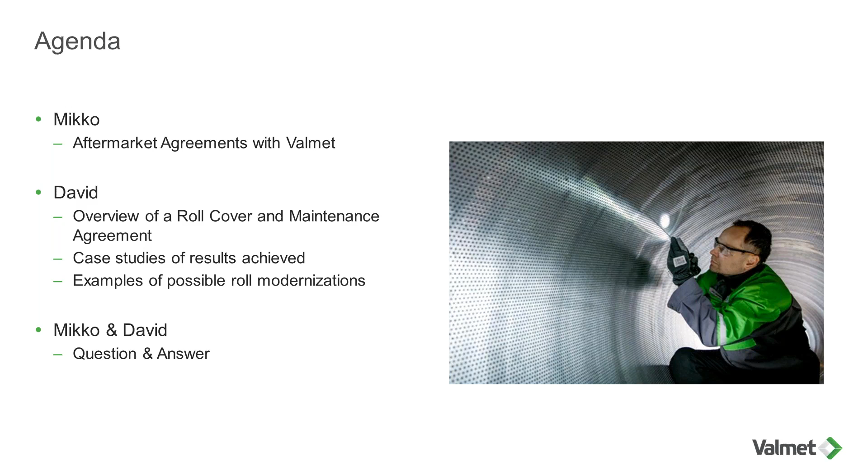Finally, we'll allow 10 to 15 minutes of time at the end for questions and answers.

Take it away, Mikko. So, good afternoon, everyone. As you heard, my name is Mikko Viljama, and I'm the head of the Valmet agreement business here in North America. I've been with Valmet for 25 years, the last 15 years or so in North America, and I am currently located in Atlanta, Georgia.

Before we let Dave talk about rolls, I was going to give a short 10-minute overview from 25,000 feet of Valmet's agreement business, how Valmet approaches these agreements, and what are some of the things our customers are looking for from these partnerships. About 10 years ago, Valmet made a strategic decision to focus on long-term agreements.

This wasn't really a difficult decision to make, as the message from customers, you guys, was loud and clear. You wanted to move away, when possible, from traditional transactional business, and were willing to seek out other easier methods to do business with Valmet.

A little bit of our services philosophy, and if you start from the bottom, you see that it starts from our core values, which are: safety comes first, we want to be close to you guys, we have people you can trust, and hopefully also solutions to match your needs.

The second layer of this philosophy is the lifecycle approach, which means that we want to be part of the product from the day it leaves our facility to the day it becomes obsolete.

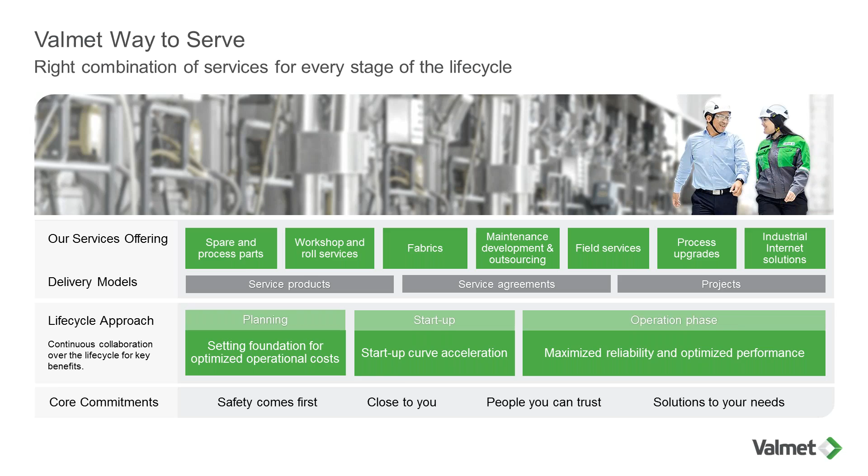You see the same offering here with maybe a little more detail, and I'm assuming that most of you are familiar with these, so I'm not going to go through them. Rather, my message here, when we look at this slide, is that basically anything Valmet offers, may it be a product or service, can be built into an agreement format. So if you are buying something regularly from Valmet, I would highly recommend that you ask your local friendly mill sales manager if there are any opportunities to simplify this business and make it hopefully even more beneficial for both parties.

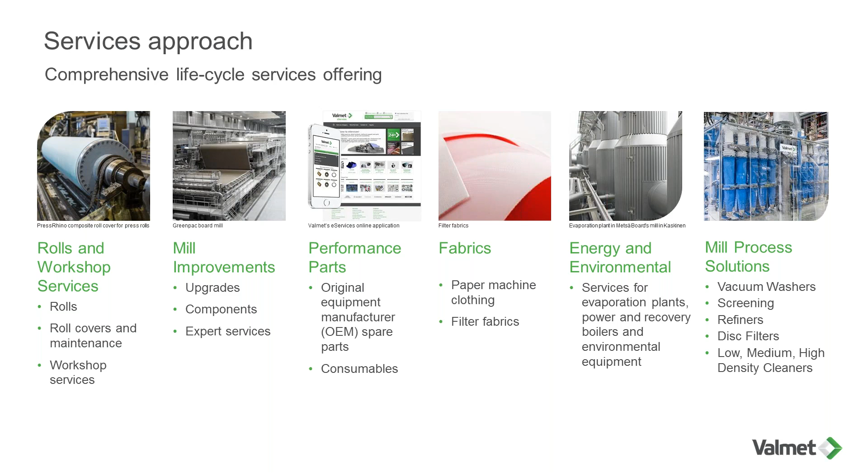So what's typical for an agreement then? My personal opinion is that it makes little sense to make an agreement for just 1 or 2 years. Therefore, I always recommend starting with at least a 3-year agreement. The reason is that it takes some time to get to know each other, for us to understand how you operate, and what might be the possible challenges you have at your mill. So we typically start with a 3-year agreement, and hopefully at the end of that period, we end up extending it for another set of periods.

These agreements can be either corporate level agreements or mill level agreements. If they are corporate level agreements, they typically work so that the individual mills are automatically joined to the agreement, or the mills can choose if they want to be part of an agreement.

With corporate agreements, and here I'm talking about any kind of agreement—rolls, stockers, consumables, and so on—we talk about different tier levels typically, depending on the business volume that the mill does with Valmet. With these different tier levels, we of course include different services, incentives, and programs, such as continuous improvement programs. We approach these agreements as projects.

Project agreements also have a dedicated project or agreement manager who manages these agreements. Especially if it's a corporate level agreement, we establish a dedicated agreement manager for that.

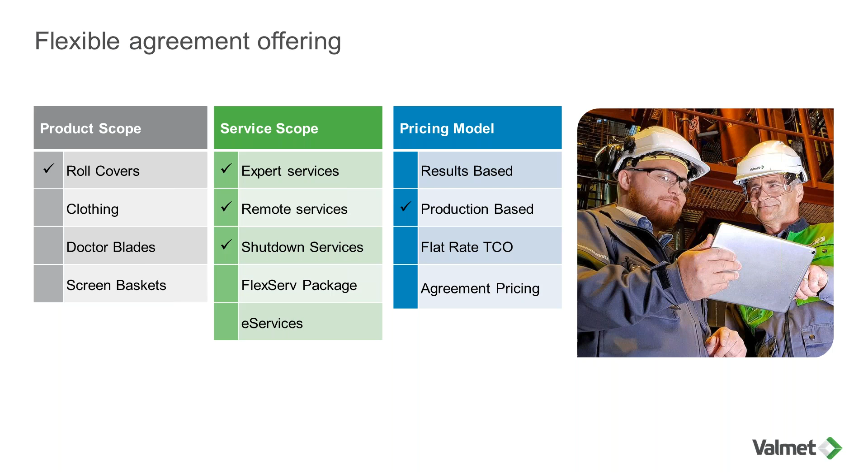What I wanted to point out here is that we Valmet people are famous for wanting to talk about our own products and services. But I personally would like to turn this 180 degrees around and look at each of your mill functions or personnel, the tasks and responsibilities they have, and understand what keeps these people awake at night. And if there are challenges, especially if they hinder you from concentrating on your core business, which is making paperboard or tissue, let's see if there's something we can offer to help you with these challenges.

So a lot of agreements, but not too many identical ones. Even with a lot of different agreements, we still see some trends, some common drivers which make our customers seek these partnerships. By far the reason number one is reliability. It seems like everybody's looking for more reliable operations, partners, etc.

A solid number two is cost. I'm not talking about finding the lowest price. I'm talking about partnering with someone who can reduce the overall cost during a certain time frame and also help the mill, the customer, to budget this cost and stay within the budgeted cost.

Everyone appreciates a proactive partner. To give an example of how Valmet does this proactive approach, we can take a look at, for example, the roll agreements, which Dave is going to talk about in a moment. We always start those with a baseline audit to understand the current situation, and after we know what that is and what the KPIs and targets for that mill are, we build a roadmap for how to achieve those goals.

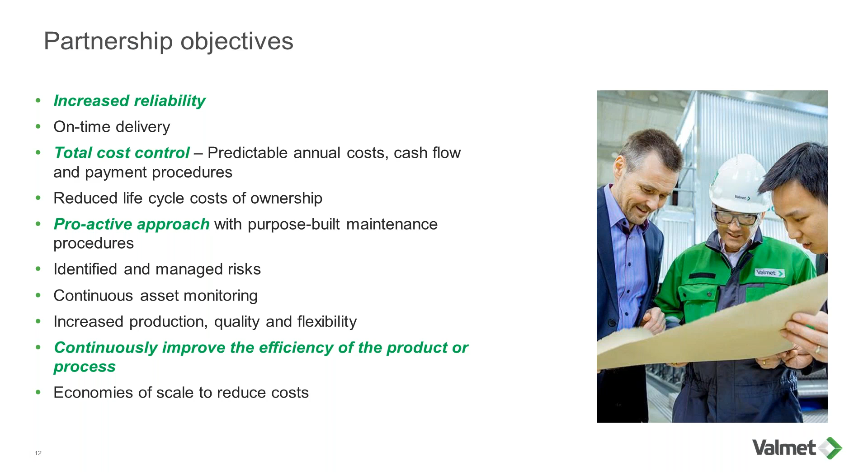We signed the first agreement 15 years ago with Temple-Inland's Ontario mill. We have a culture of doing these agreements, and we also have a dedicated group of people who manage these agreements.

The most important thing for us is to understand each customer's specific KPIs and targets, so that we can build that tailored agreement for that customer. And when we have those KPIs and goals, then these will become our commitment and our common goals to achieve for both of us. I already mentioned the total cost of ownership, the TCO approach.

So with Valmet agreements, you'll get access and support not only from our local people here in North America, but also from our experts globally. And with that, Dave, I'll give the floor to you. Thank you.

As Mikko mentioned, there are several levels of agreement within the different service models of Valmet, ranging from spare parts and mill site services, roll services, etc. But even within the roll portion of the business within our service sector, we have ranges of agreements as well. Mikko mentioned the first agreement being Temple Inland Corporation in the mid-2000s.

Prior to that, we even had a single mill agreement, which probably started several years prior to that, in the 2004 range, and that would have been probably what you look at on this scale as a supply agreement, with discounts associated with a volume given to us to work on.

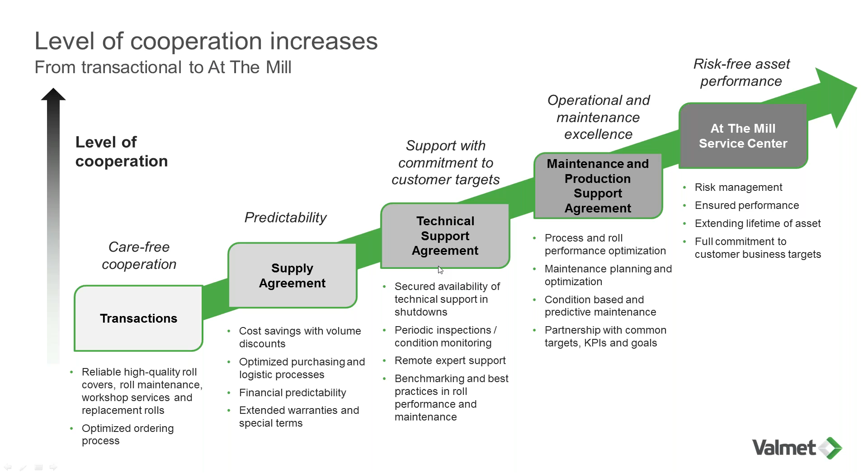And it all starts, if you're a new customer, with audits of both covers and the mechanicals of the rolls, so we understand what you have. Then that baseline of where you are is compared to what your goals are. And by comparing what's currently in service and what your expectations are for performance and cycle times, we can sort of map out from there what the scope of work needs to be.

And if the desired run times are maybe a little bit more challenging than what the current equipment can do, then we have upgrades and things of that nature to help extend your run times as well.

Once the path forward is chosen, Mikko's group steps in as agreement manager. The goals are set, and we have semi-annual, annual, or quarterly reviews based on the customer's desire to touch base and see how we are performing against what our goals are.

The information can be kept in Valmet Asset Manager. Some of you guys may be familiar with an older term known as Roll Tracer. Roll Tracer has been upgraded to the point now where it can house all of the history and scheduling needs for not just rolls, but say fabrics and spare parts as well. So it's a broader service than just a roll tracking system.

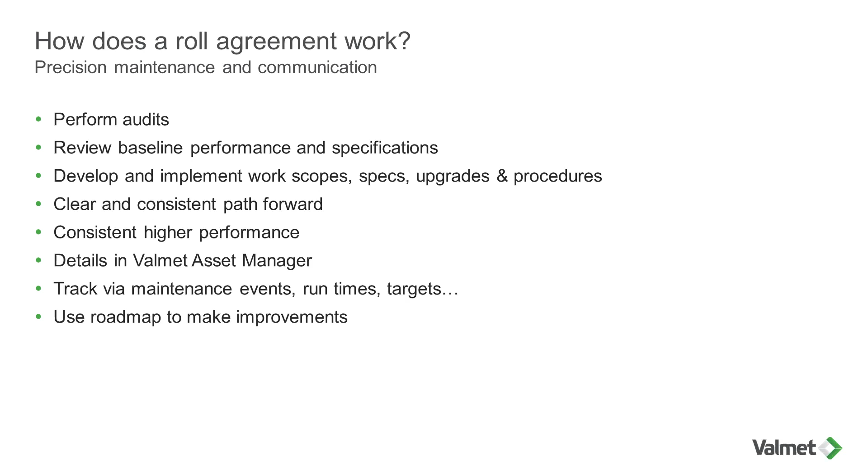Then as far as what type of support you guys should expect both off-site and on-site from your mill, typically the way it would work, this focuses on a single roll, if you will. Typically there is a product sales manager there to support during the down day when the roll's removed. It's up to the customer typically whether they want to handle the logistics to move the roll or they want Valmet to. The roll is torn down, inspected, documentations of inspections are created and sent.

If there is no additional work that needs to be done, the remainder of the maintenance is taken care of. At the end of the day, the documentations and the reports are pulled together and sent to the customer.

Within the same time frame as the roll is returned, we would usually have the PSM there also for installation support, including things like nip impressions and things like that.

When we take our service models and some of our different technologies for simulations and whatnot, we can look at what happens between when we service the roll and the next time it's removed.

We can compare, based on vast experience with new and old machines, where your equipment is running compared to your competitors in benchmarking. That's always of interest to people. Performance optimization through simulations is never a bad thing to take a look at.

Condition monitoring, whether through iRolls, accelerometers, or monitoring equipment in conjunction with our automation group using the industrial internet, is all available. Then, as simple as using the asset manager, you can monitor conditions to some extent by comparing run times and what was done on different maintenance services.

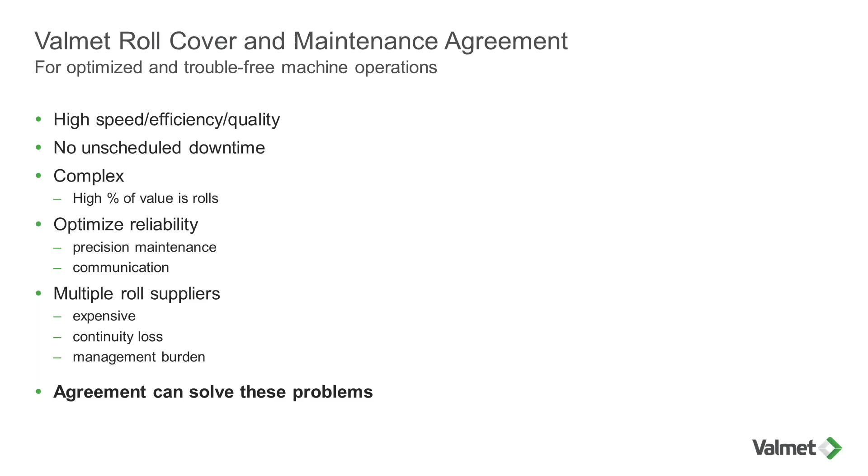So the systematic approach - basically we feel you have pretty vast experience running your own mill. We have experience building rolls, rebuilding rolls, making covers on the service side, but we also have access to Valmet technology and new equipment through the capital group.

Combining those three and working together really can equal a solutions package that's very difficult to be touched by others. Reducing cost, managing your assets, and even understanding what your next investments need to be can be very beneficial and improve revenue.

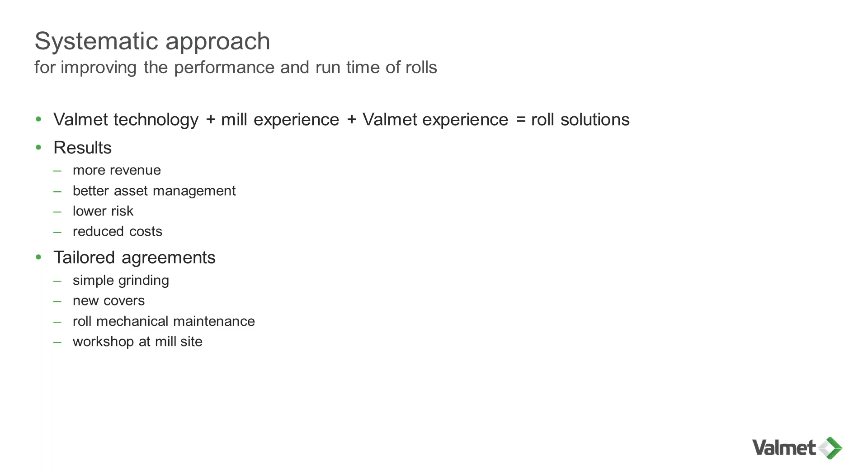This last bullet point we sort of touched on - it's a reiteration of the different levels of agreements available out there, even just for rolls. Could be a simple grinding contract, a simple mechanical contract, maybe just covers, or we could even get involved under the right circumstances and help you run your service center at your mill.

The other piece integrated pretty well within roll contracts is replacement rolls. The technical age of most machines in North America is probably an average installed date of around 1985. That means there's a lot of old but robust equipment out there still running well.

But since 1985, you can look at the host of suppliers now under the Valmet umbrella. We've made significant technology improvements in all types of rolls in that time frame.

And as you order a new spare roll, obviously we cross-reference the age of your roll, the design of your roll, and consider what types of upgrades can be made to impact its runtime and performance while it's in the machine.

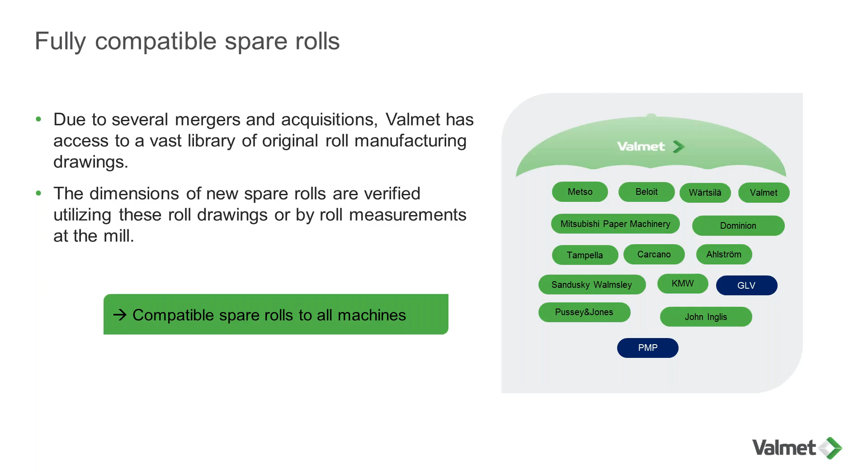When it comes to discussing saving money and agreements, case studies often open eyes better than nearly anything else. So we're going to run through several case studies here, some from a standard mechanical service agreement, a tissue, and maybe two board examples.

This was a fine paper mill in the Northeast who had an agreement with a local shop but was unaware of seal clearances on the suction roll seals to the shell. They were unaware of the deckle clearances on the end and what they needed to be. They didn't have bearing clearances necessary other than from the book, and there were a lot of details about an old Beloit or Valmet roll being serviced locally.

What type of benefits usually come from this type of agreement? Usually the ones that pay off in large dividends are increased production and improved sheet handling, which actually becomes increased production, and in some cases better sheet quality if you're able to avoid things like sheet marking. That allows you to chase a different customer base.

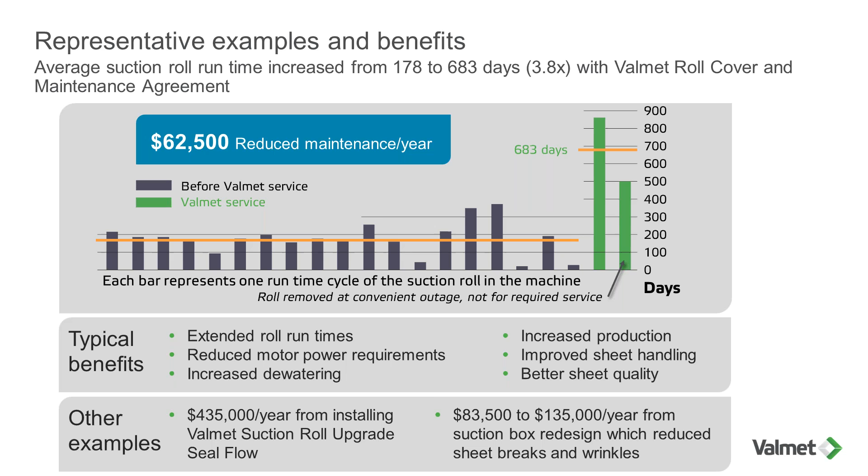This is the first of our liner board examples, a lightweight liner board / bag producer in the Southeast. This machine was built in the 1980s and originally commissioned to run high-speed newsprint. They came to us after originally replacing the granite roll with a PressJade release type cover, which is designed for high stickies in recycled LWC and/or newsprint.

They were moving to board and came to us asking about the give and take between the two designs, a PressJade W and a PressJade release. Put simply, the W stands for wear and/or wood containing grades, and release stands for high DIP content, so the release design is to combat stickies. The W is a little less focused on release and more focused on long-term wear. This customer was concerned that moving to a wood-containing grade would wear the roll out. We talked them into not making the change, leaving the press jade release in place to see if their concerns were warranted.

In the end, they're still able to run the roll to 3-year intervals with no conditionings in between.

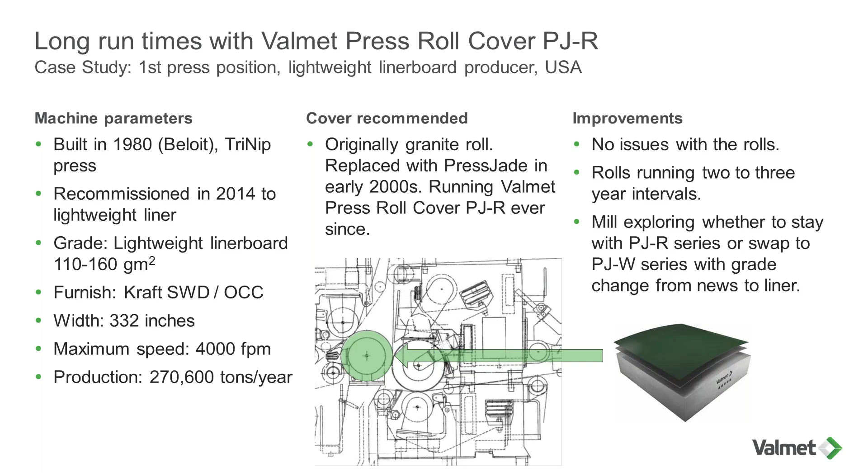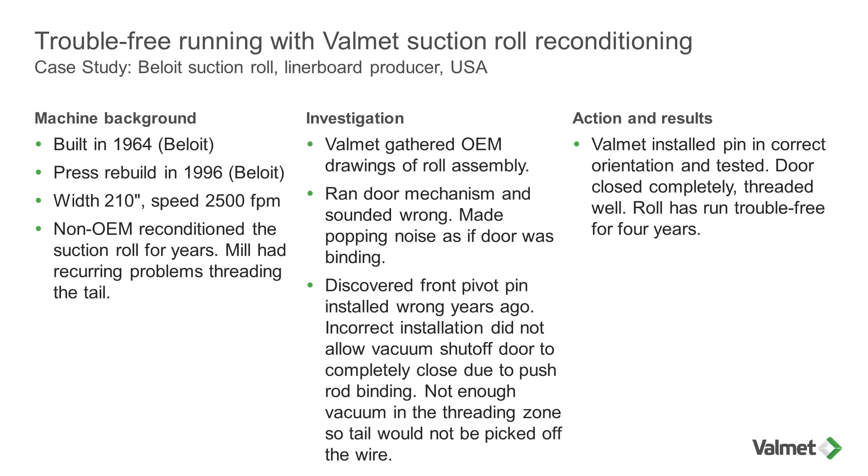The second example is a board producer in the South. These guys had an original build from 1964, fitted with an open ENP shoe press in 1996. They have probably an LMP, would be the best way to describe their first press, followed by the shoe press. For that design, to thread the press section, you have to have what's known as a rabbit trap.

Huge risk of wrecking the shoe press. So being able to go back to the original design and original intent of this roll saved quite a big press wreck.

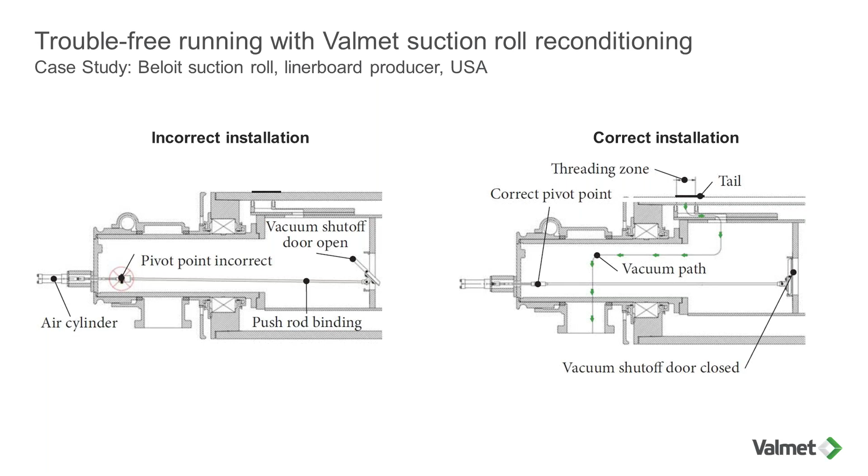Here's another rebuild situation. The machine was originally a 1977 Tampella, rebuilt by Beloit in '99 with two back-to-back open ENPs. This particular customer was struggling pretty badly with roll cover wear, blanket wear, and even mechanical wear on the inside of the roll.

We were able to modernize this roll, installing capillary tubes, what's known as a hydrostatic type shoe, vastly improving the lubrication, reducing temperatures, and basically not just saving the roll itself, but all the equipment around it.

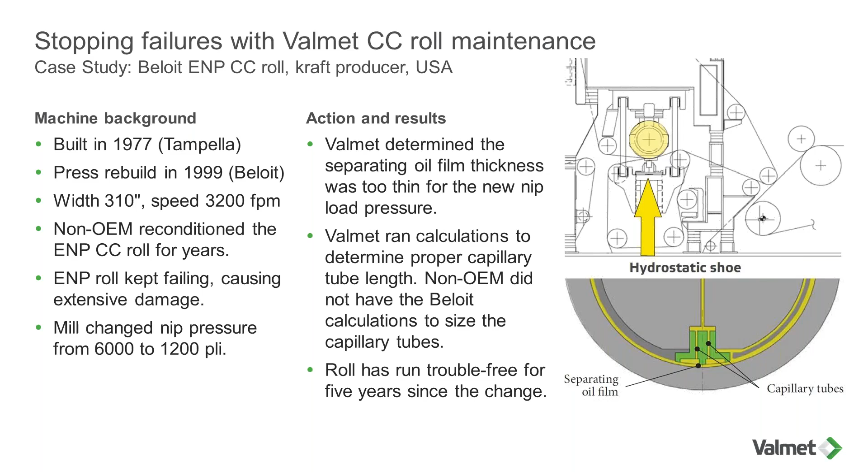This is more of a tissue case. In the tissue mills, the nips against the Yankee with pressure rolls and suction rolls is basically the most important thing going on. This particular customer, we had done some background work for them to simulate the differences between rubber and poly. We found that moving to poly would improve their solids some. This is a case in South Korea where we sold these covers.

We also sold them what's known as an iRoll portable. Both Valmet and some other suppliers supply permanent iRoll type or smart roll type devices inside the cover for monitoring pressure and giving the customer an indication of what their nip profile is like while the roll cover is in operation. The portable iRoll is something that only Valmet offers, and this allows us to install a similar sensor on the surface of the roll and allows us to run it up to speed and check all of the profiles.

If you have an accurate design of experiment, for lack of a better way to put it, if you know what you want to look at when you get started, you can solve nearly as many problems as you would with a permanent install, and you can accomplish everything you want in a 4 to 8 hour time frame. You don't have to worry about the long-term maintenance hassles of keeping milliamp type electronics running in a very wet environment. It can be done, but it's not easy.

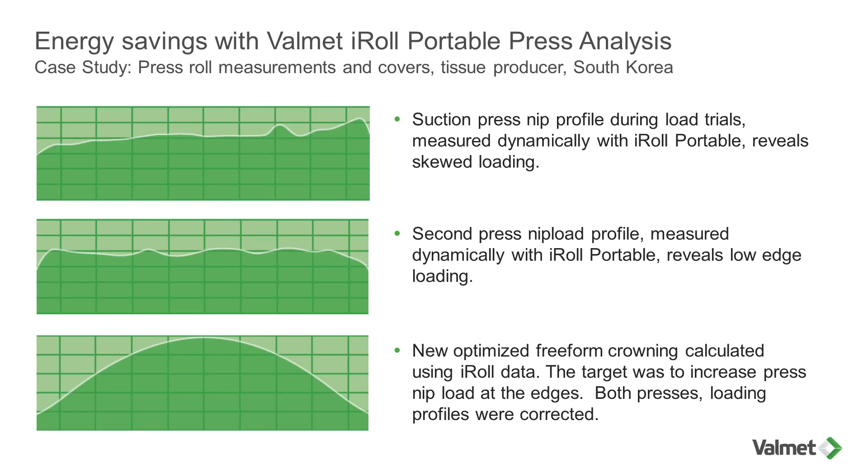In this particular case, the customer was showing pretty poor front-to-back skewing on their suction roll, and the second press roll showed pretty significant drop-offs on the edges. They were not able to maintain pressure out on the edge. Whether it had something to do with the roll or the Yankee, I'm a little unsure of—I haven't studied the case that much. But by analyzing the iRoll data, they were able to create a new crowning profile for the roll, which improved not only their overall solids coming off the Yankee, but also their profile.

Now I'm going to step back to the previous slide to review the results. They saw a 5% steam consumption reduction, and also saw improved moisture profile and improved solids coming off the Yankee, plus an increase of 30 meters per minute—which, had they factored in that 5% steam consumption as well, would have been an even bigger gain on the production side.

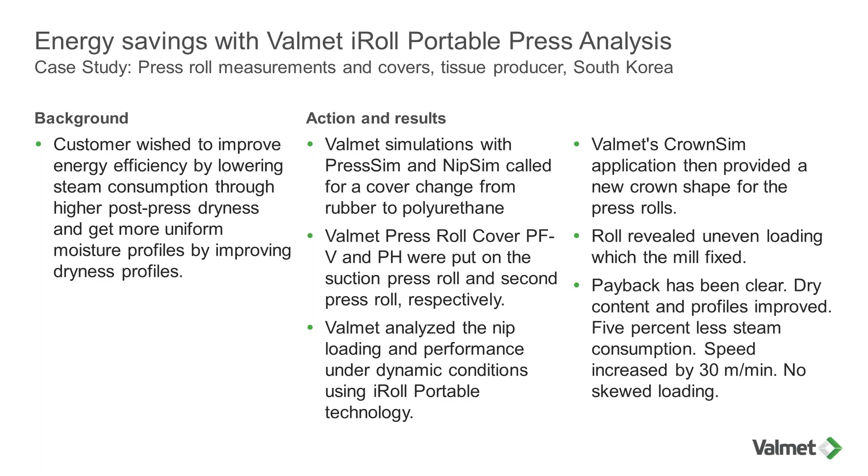To spend a few minutes explaining our maintenance concept: we talk about scheduled maintenance or regular maintenance as the services on the left. I'd say think of that as an oil change rather than a full overhaul on your vehicle. This is where the roll comes in and parts are changed, where parts that might make it a second run are inspected, and we do not totally tear down bearing assemblies. That's the key to what scheduled maintenance is.

If you run a tissue machine, it's an oil-based application, and you get 6 months on a rubber cover in the nip, you may pull it out after 6 months, grind it, put it back in the machine, pull it out after another 6 months, do a scheduled maintenance, put it back in the machine for 6 months, pull it out, grind it, and then on that next maintenance rotation, you would potentially go to what we call recondition services—where not only are you going through your regular wear components, but you tear down, inspect the journals, NDT the journals, NDT the heads, and verify that all of the long-term components are still in good shape.

Finally, on the right, what's highlighted in the box is what in North America we call modernizations, but I think on the global level they still call it upgrade type products. You've heard me mention that a few times on the call, and I wanted to make sure you guys were aware of what I'm talking about.

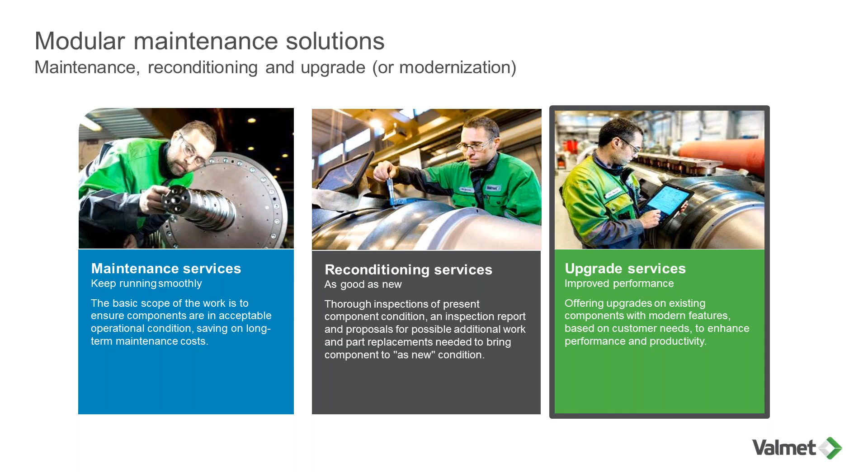If you go back to the average age of equipment in North America—at least roll equipment—being maybe from 1985, there have been a lot of upgrades to both suction rolls and couch rolls in the past 35 years. Here are some examples: some of the older designs, like Tampella or Carcano, might not have the internal worm screw for adjusting the box, in which case customers at times, if they want to adjust a couch roll or pickup roll, may actually have to put the sheet in the couch to be able to move the box. That's painful and can be upgraded to a box that you can rotate on your own.

I'm not going to go through each of these, but another one worth mentioning is the internal ShellFlo H, oscillating internal shower, which today we also have a compact version of for maybe North America specifically, because 70% of the installed base here is Beloit, and the fit between the box and the shell is a little tighter for Beloit rolls, so the compact version may be thought of as a Beloit design for internal cleaning showers.

This basically is water driven. It oscillates back and forth. It can be tuned in to come on during breaks and clean the shell from the inside out rather than from the outside in. Today, most suction rolls that have cleaning showers are outside in. The advantage of being internal is that all of the material knocked out of the shell is now being knocked out of the shell instead of getting caught up in your suction box and anything else you wouldn't want it to get involved with. If you had some vacuum leakages going different ways, you could even be preventing water from getting into your bearings. So that's another example.

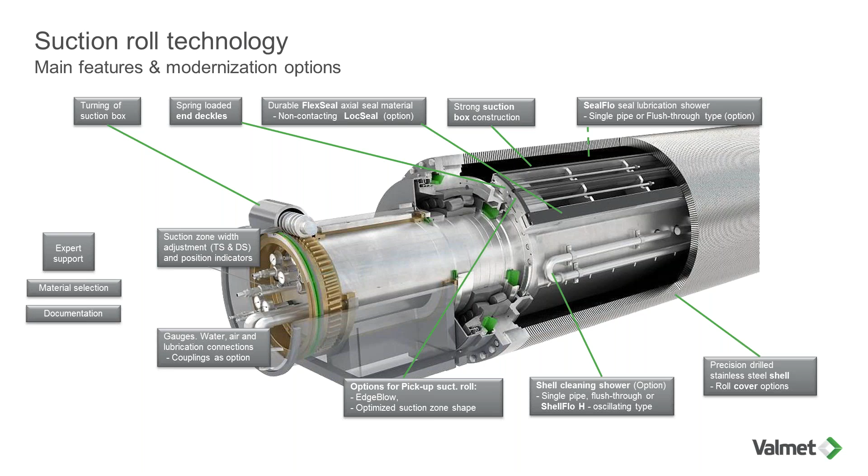A quick 2-slide opportunity to talk about crown control roll upgrades. One of which I see to be most beneficial is your standard Valmet CC roll, designed in the 60s, probably on up into the 90s, often had an inline drive hub, and due to that, had to have a triple race bearing. Triple race bearings now are manufactured on limited manufacturing schedules, and as a result are quite expensive. But by altering that design to a standard bearing with a gearbox and an offset drive, you may have to spend a little money on the modernization, but it puts you in a place where your spares and bill of materials and components for the roll are now much more standardized and saves a lot of money in the long term.

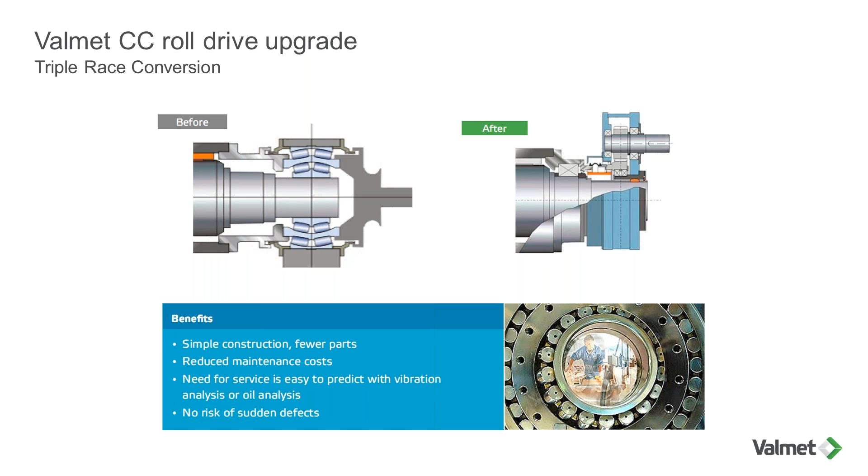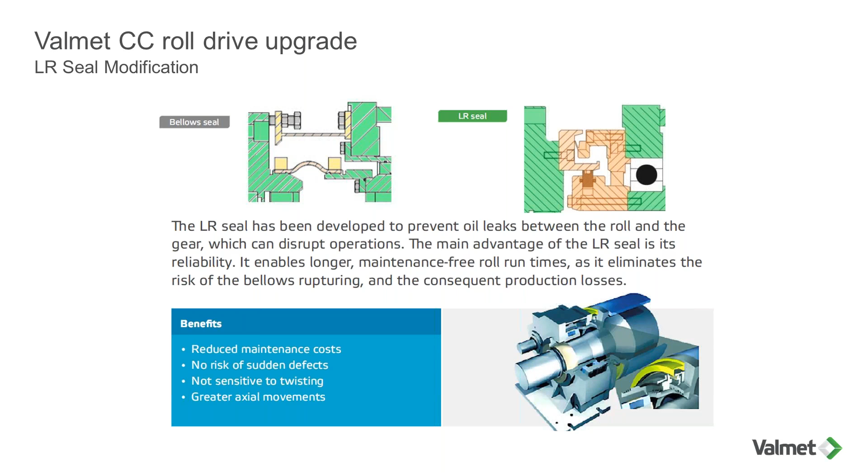Another example of upgrading an old Valmet design to a newer design is the seal modification, where on a CC roll gearbox to roll interface, they would use the gray on the left, which were rubber bellow seals. And as you guys know, as rubber ages, it starts to crack. If you don't believe me, go look at the sidewalls on your vehicle. If you've got an old set of tires, especially if you live in the South where there's a lot of sun, you'll eventually start to crack. Well, these bellows would do the same, and as a result you'd have safety hazards and oil losses, all of which cost money. Today, the LR seal is a mechanical replacement of those rubber bellows, which can't rot on the shelf because it's not rubber.

In summary of the things we've talked about from roll services agreements, I wanted to point out again that we talked about a very wide range of service agreement types. I will admit we are trying to standardize for our own sake, maybe discount levels, so that we don't get confused between our different customers. We kind of have a standard offering of what sort of discounts we would offer, but it doesn't mean that the range of service types would be limited in any way.

Commercial and value-added benefits of a service agreement, we discussed that a bit. What the implementation schedule and how it would be implemented was discussed a little bit. What type of replacement rolls and how that would dovetail into the service agreement was discussed. We reviewed 4 case studies and described the modular maintenance concept. Each service visit should not be the same. There's plenty of ways to save money by understanding your equipment and how it needs to be serviced, really no different than a vehicle. And then modernizations and what those are and what that word means.

That was a great presentation, Dave and Mikko.